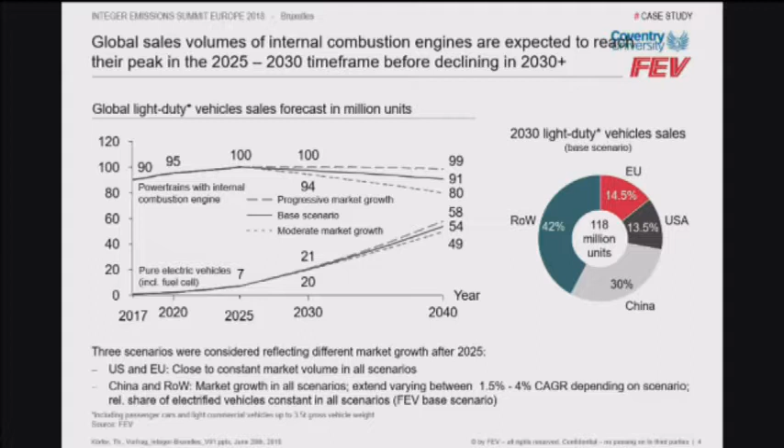When we look at where the growth is, what we also see is a significant increase in light-duty vehicles without an internal combustion engine over the years. But in the end, the main key message is that for the foreseeable future, there is still a very high share of internal combustion engine vehicles around.

If you look at the current situation of the diesel market share in Europe, up to 2015, before the diesel scandal, the market share of diesel-engined light-duty powertrains was fairly constant, around 50% in Europe. After the diesel scare and scandal, and the increasing discussion about access of diesel engine cars to urban areas and driving bans, there's been a very steep decline since then. For example, in Germany, in November last year, the diesel market share was only 34%, compared to values around 50% before the Dieselgate scandal. This is a universal trend across Europe, with the only notable exception being Italy at the moment.

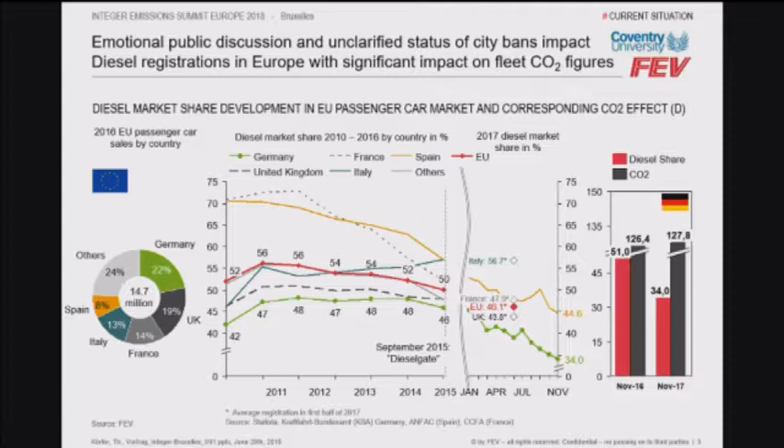What we've also heard from BMW is that this is not without consequences on CO2 emissions. What we saw last year for the first time is that the fleet average CO2 emissions of new cars increased compared to the year before, and that is directly linked to the diesel market share.

If you look at what that means, at certified fuel economy figures and real-world figures, displayed here as lines, with certified figures as bars, we can see there is a very significant difference in fuel economy between diesel and petrol cars. This is in the range of up to 40% if you look at volumetric fuel economy. And if you look at CO2 figures, normalized to an identical vehicle weight, we see roughly a CO2 advantage for diesel engine powertrains in the range of 28%.

That shows that diesel is an extremely important contributor to meeting future CO2 emission legislation, and therefore it's vital to keep this engine and powertrain option attractive. It's really key to keep in mind, despite lobbying from specific groups, that diesel engines lack a benefit in terms of CO2 emissions, which is thermodynamically wrong.

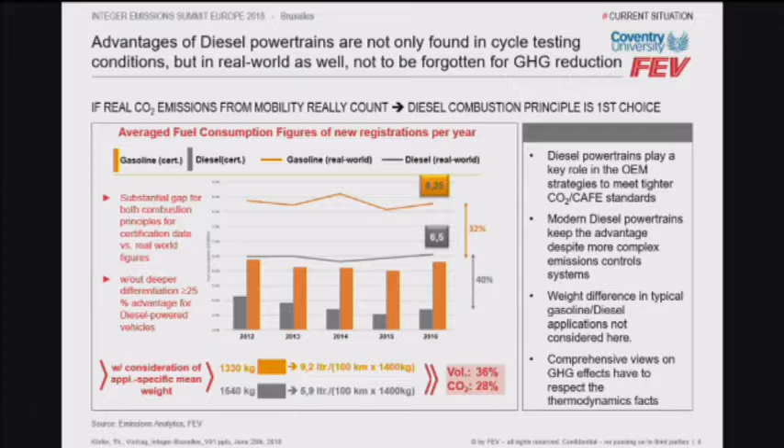It's also proven, for example, by publicly available data, whether from Spritmonitor, or, before the talk I had a quick look at Emissions Analytics EQ data for a BMW 2-liter engine, and there's a very clear step change from petrol 2-liter engines to diesel 2-liter engines, and the diesel has got that very clear advantage. It's worthwhile to keep that advantage alive and on the market.

So when we look at legal requirements, I specifically added Chinese emission legislation here, because China, in terms of light-duty emission legislation, is at the moment moving a little bit ahead. What we can see, if you look at China 6B emission legislation at the bottom, which will be introduced from July 2023 onwards, is a NOx emission target of 35 milligrams per kilometer.

And this is combined with a few other quite challenging emission regulations. The conformity factor for this is 2.1, meaning the real-world NOx emission level is 73 milligrams per kilometer.

And there are other aspects, taking into account specific geographical and topological boundary conditions in China, such as high altitude and a broad temperature window. China also enforces very stringent US OBD regulations.

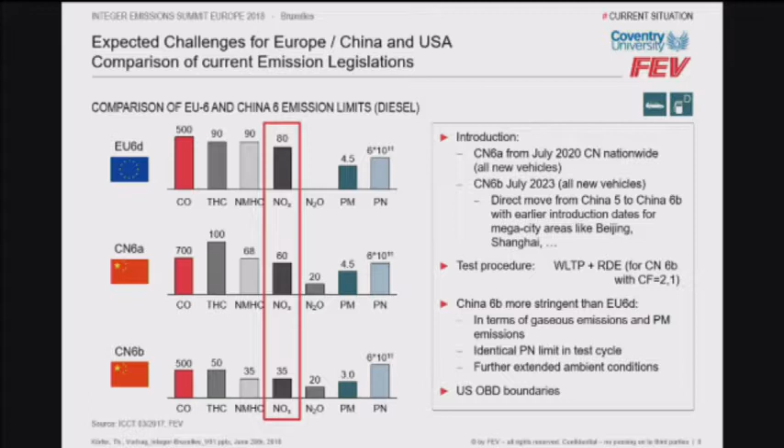So if you look at what that might mean for a future Euro 7 scenario in terms of extended environmental conditions, the altitude range might be further expanded. And if you look at the Chinese altitude range, there's also a significant increase in the temperature range. That means there's a very big task upcoming in terms of future emission compliance for the light-duty diesel engine.

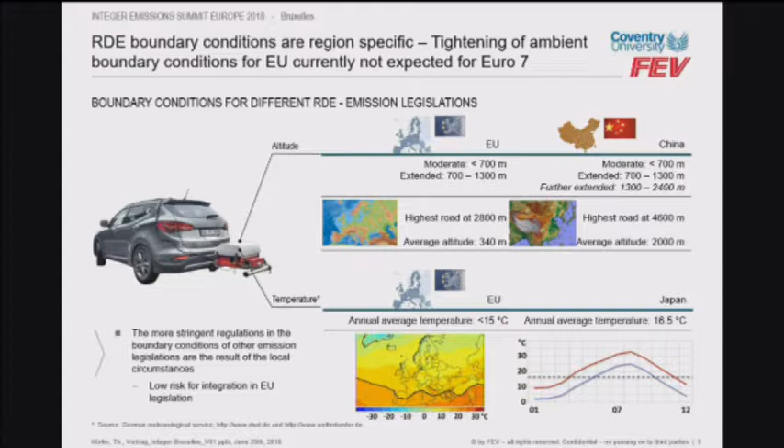We need to have a look at emission compliance in real driving conditions. In a study with a catalyst supplier, we looked at different driving cycles - at the top a typical RDE cycle, at the bottom the WLTC cycle. In order to have a view on the most challenging condition, the task was to investigate specifically the urban cycle of the RDE cycle, but over an extended period of time.

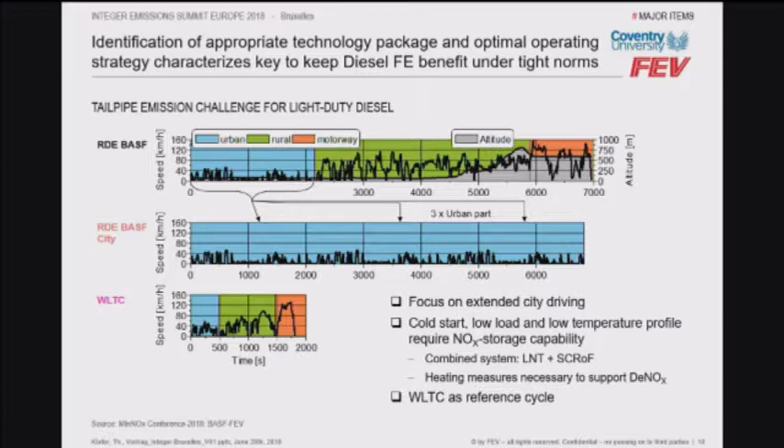That means the challenges on the low temperature activity of the exhaust aftertreatment system are increased. Just to highlight that importance, if you look at the frequency of the temperature achieved for the different cycles, we have the catalyst temperature upstream the LNT on the x-axis, and the relative frequency on the y-axis.

If you look at the marked city cycle, we can see that basically the vast majority of operating points are below 200 degrees C upstream the LNT. The average temperature in this very challenging cycle is on average only 175 degrees C. So a very big task to achieve good conversion efficiency under these conditions.

If you compare that, for example, to the WLTC or a typical RDE cycle, we see that those cycles are much easier to work with from a thermal management point of view.

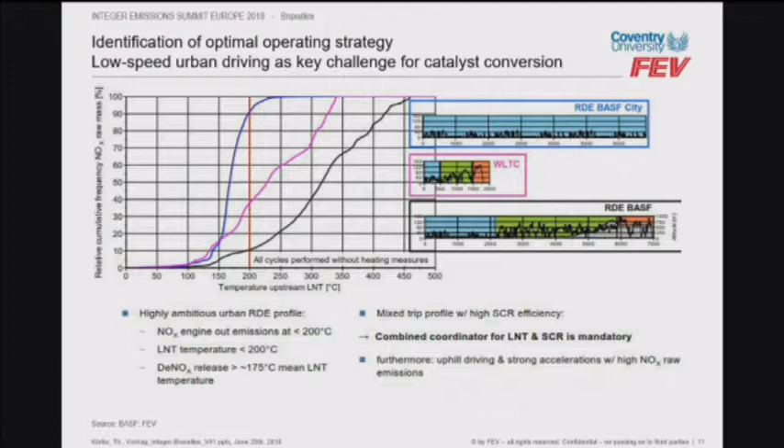Just to highlight what that means, in such city cycle conditions, because it's relatively low distance, we need to be able to light off the catalyst very early on in the cycle, in order not to violate the legal emission limit just because of emissions during the warm-up.

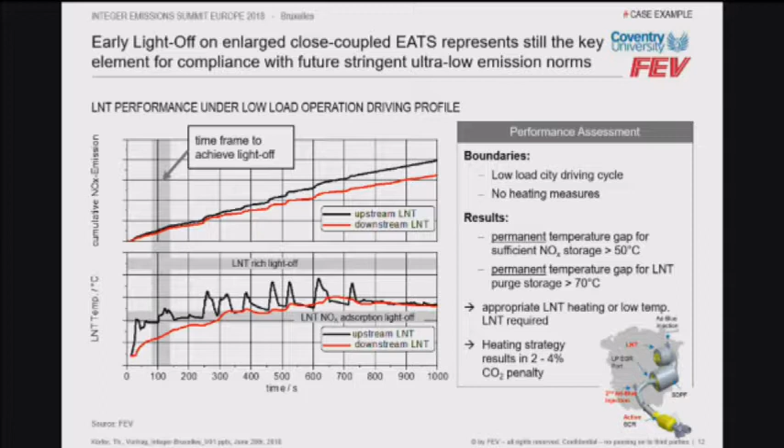There we can also see an indication of the technical solution which we proposed, which is a combination of a close-coupled NOx trap combined with a close-coupled SDPF and an additional underfloor SCR system - so it's a three-stage NOx reduction system. And then in combination with an appropriate thermal management strategy, this very low-speed urban driving cycle is associated with a relatively small fuel economy penalty of only 2 to 4%.

If you look at other technical innovations in powertrain and future powertrain configurations, we have this three-stage DeNOx system with an LNT, close-coupled SDPF, and an underfloor SCR. The advantage is the combination of different NOx aftertreatment devices increases the temperature window in which a highly efficient NOx conversion can be achieved. However, when you look at such a system, it's not just adding the components to the system.

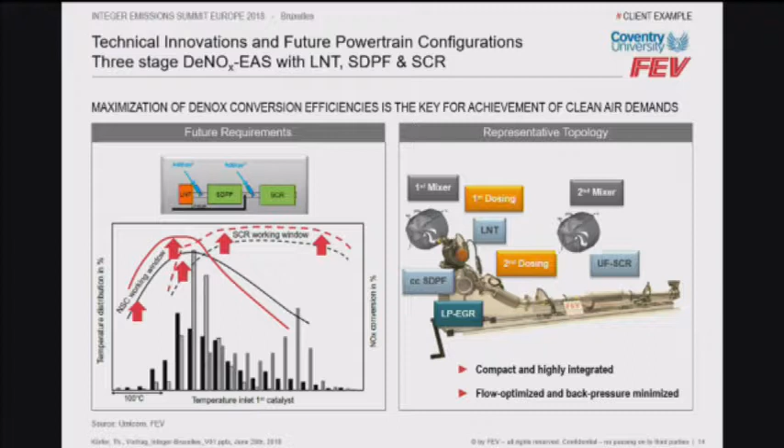A very high degree of optimization has to go into the layout of the system, for which I will give a few examples. One key element of an optimization is the selection of the washcoat for the LNT.

Typically, the starting point is the washcoat formulation of a normal standalone LNT, which is quite common on Euro 6B vehicles, which has a relatively broad temperature window. But if you take into account that the LNT operates in combination with an SCR system, we can optimize the LNT for increased low temperature activity.

So to give the system an overall higher capability. And also what has to be kept in mind is that with the increased low temperature activity, the robustness of the system over full useful life against desulfurization events, or DeSOx events, has to be improved, and that is possible with state-of-the-art washcoats for LNTs.

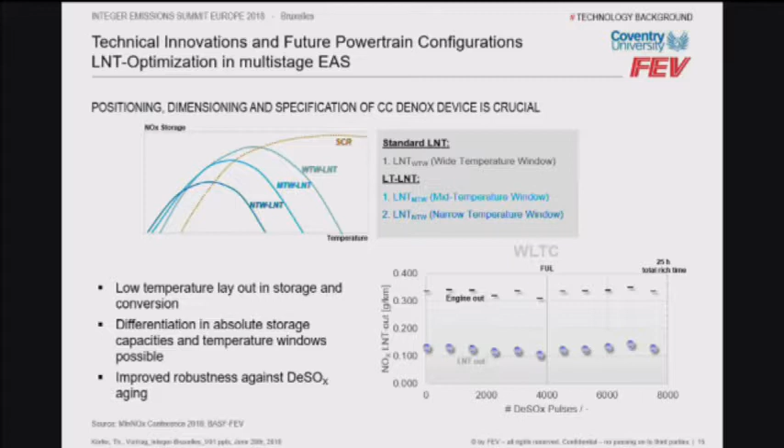Another aspect which is extremely important for such a system is the uniformity of the ammonia distribution on the SCR catalyst. And basically, as part of this study, we investigated and optimized the mixer design to take into account optimum ammonia distribution and low pressure drop.

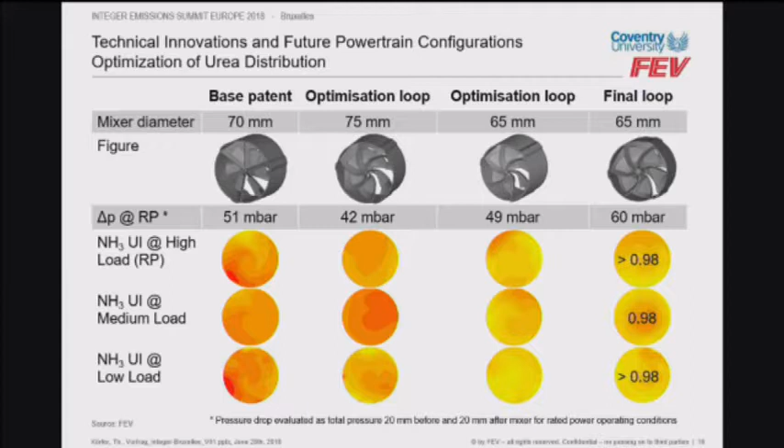In the end, the final optimization achieved more or less a nearly fully homogeneous ammonia distribution under different operating conditions, from low load up to high load, with a relatively small pressure drop increase. But it has to be taken into account that also the diameter was reduced in that case due to package reasons of the exhaust aftertreatment system. So this is also very important here to maximize the conversion efficiency of the SCR systems.

Thermal management, especially for urban driving conditions, is a key element. One example from a study we had is when we looked at the benefit of an electrically heated catalyst. We can directly see that the introduction of electrically heated catalyst systems in a WLTC cycle at 3 degrees C has the potential to reduce tailpipe NOx emissions by 60%.

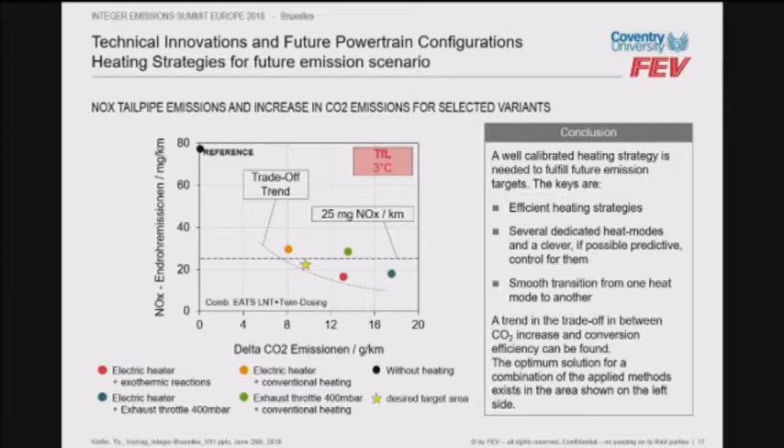In terms of the trade-off between NOx reduction and CO2 increase, an electrically heated catalyst is actually more favorable compared to conventional heating measures. We don't have to do this with an electrically heated catalyst.

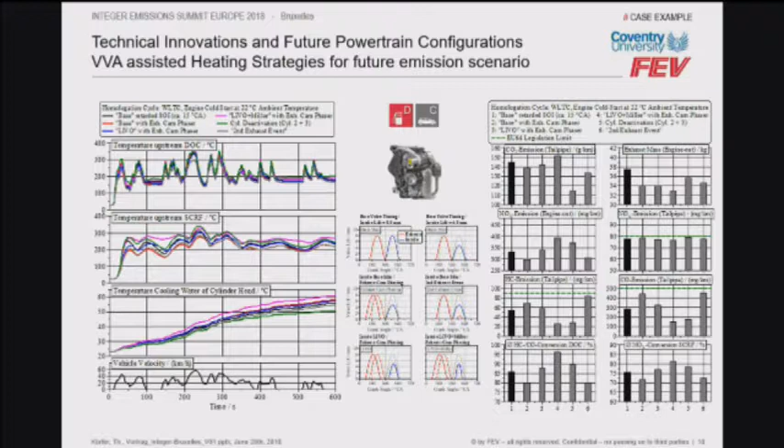Another way to enhance the capability of the engine, especially under heating operations, is the introduction of valve train variabilities to assist heating. We've investigated various different solutions, from exhaust cam phasing to the introduction of Miller timing to cylinder deactivation. In the end, what is important is that for a constant tailpipe emission in WLTC, with the introduction of valve train variabilities you have the chance to significantly reduce CO2 emissions, because you can achieve a more efficient heating mode.

Also very important, if you look at such a combined system with LNT and SCR, is a smart management of all exhaust after-treatment components involved. We can divide the storage management of the LNT into three different phases. In the first phase, when the engine is cold and the after-treatment is relatively cold, the lean NOx trap has to do the main conversion load for the NOx emissions.

But as the whole after-treatment system gets warmer, the regeneration frequency of the lean NOx trap can be reduced, and thereby the CO2 penalty of the LNT can be reduced. However, it is important that there's still some level of NOx storage management in the LNT in order to maintain a favorable starting position for the next cycle after the engine is shut off.

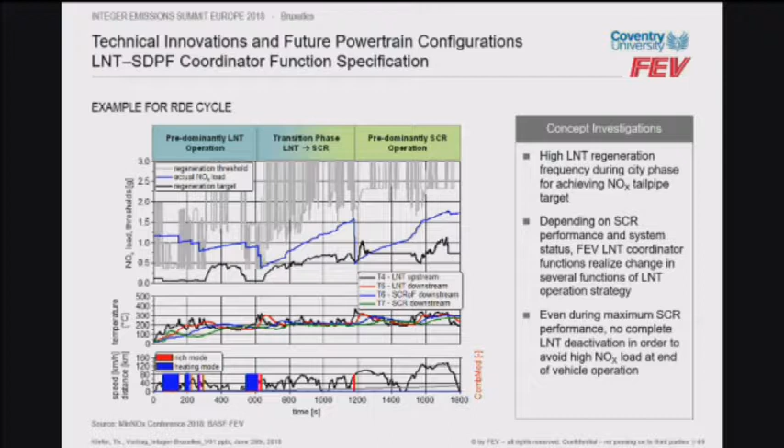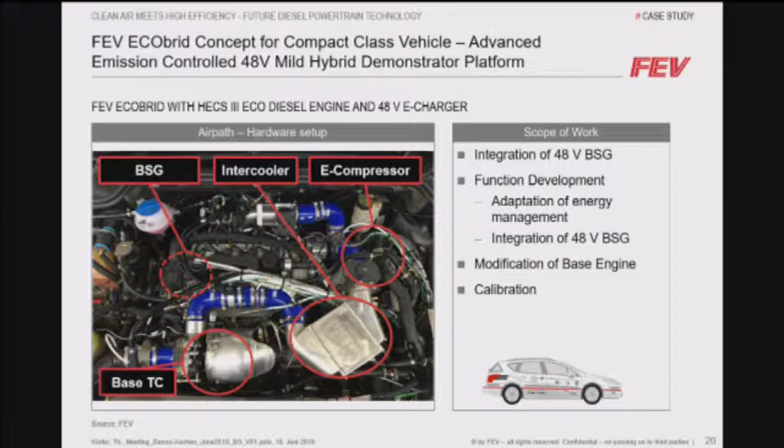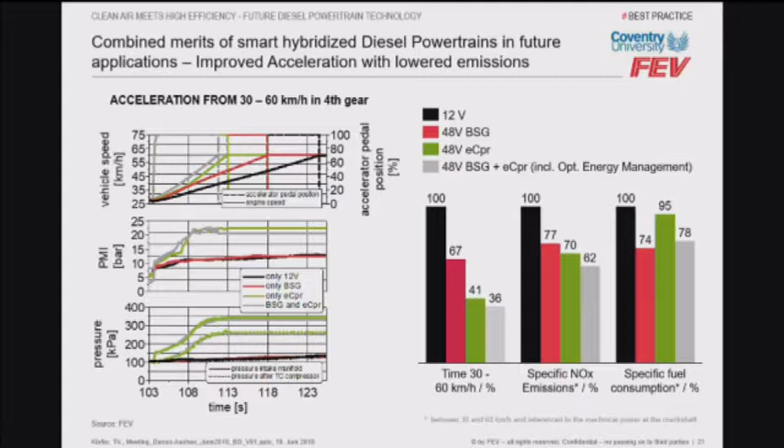But what's also very important is that the NOx emissions during this transient maneuver, due to the improvement of the response of the air system and the torque assistance by the BSG, is significantly improved. It was also noteworthy that with the operation of the e-compressor, due to improved gas exchange work under these operating conditions, we do see also an improvement in specific fuel consumption.

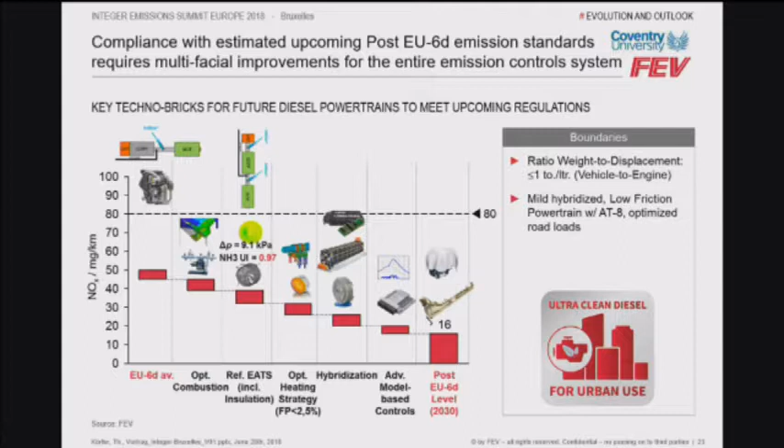Coming to a summary and outlook, which I will show in 2 stages. On the one hand, looking at NOx emissions, I simply want to spread the message that the diesel engine has got tremendous development potential to really go down to minimum NOx emissions in line with the best petrol engines. But this requires a combined effort with respect to optimizing the combustion system, exhaust after-treatment system, introduction of heating strategies, hybridization, and smart control strategies. Based on a mid-size vehicle, NOx emissions in the range of 16 milligrams per kilometer under real driving emissions are possible.

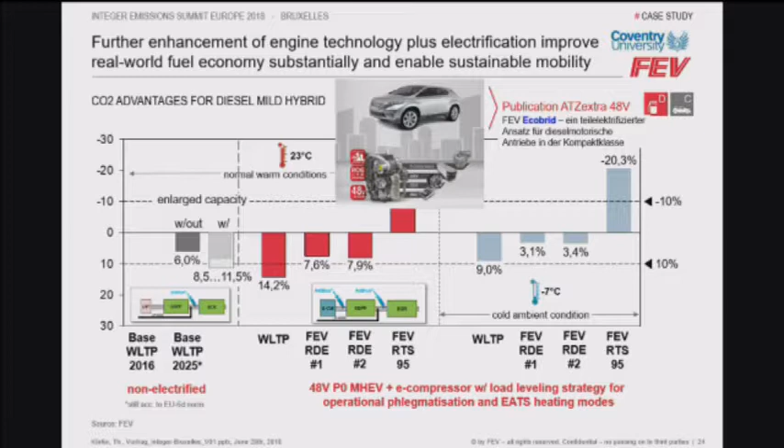I hope I could give you a somewhat positive outlook on the future potential of diesel engines.